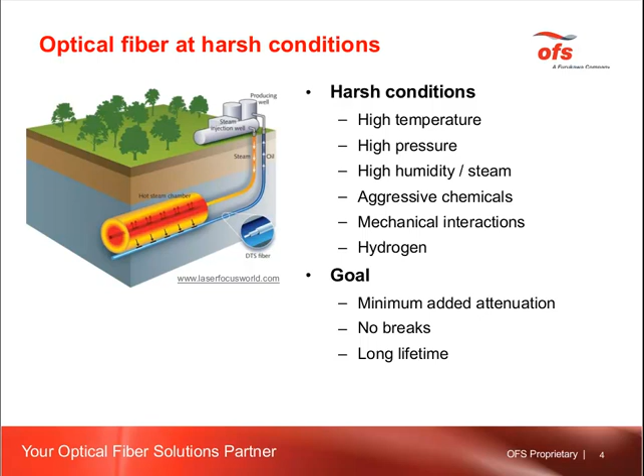And the goal for us as optical fiber manufacturers is to produce such fiber for which we will achieve minimum added optical loss during the usage time, ensure that there are no breaks in the fiber, and extend the lifetime of this fiber as much as we can. Now, what can fail in the fiber and what are the failure criteria? It could be, for instance, the loss of strength by a certain amount of gigapascals. It could be added attenuation by a certain amount of dBs per kilometer. It could be something more simple. For instance, the fiber starts sticking to the hardware, or the coating is outgassing.

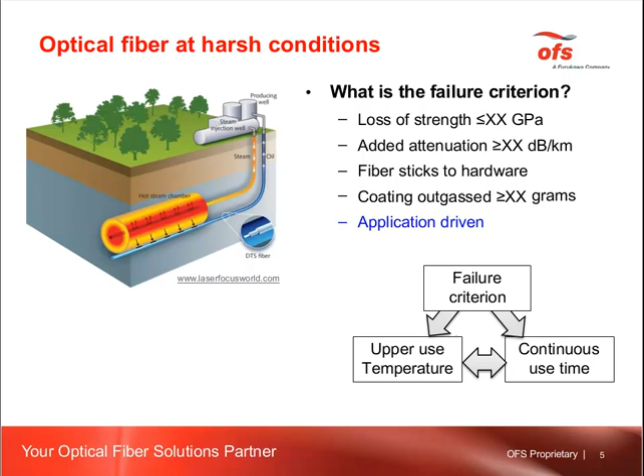And in any case, we should say that always the failure criterion is application driven. It depends on the application. Take the same fiber and use it in two different applications. For instance, one application may be in medical area, the other in geophysical. You will have a different list of the requirements, different list of the failure modes, and therefore a different list of the failure criteria. Now, if the failure criterion is defined and if the fiber is used at elevated temperatures, then we can start speaking about what is the upper use temperature, what is the continuous use time, and both of them depend on the failure criterion, and also they are related to each other. I'm going to explain it in a while.

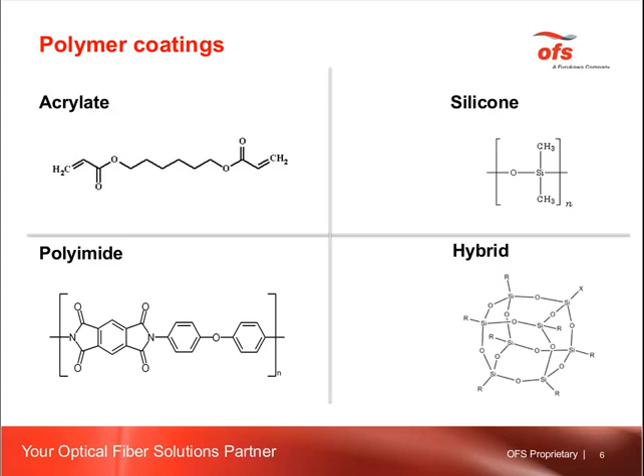Molecular-wise, there are four main chemistries which are successfully used for coating optical fibers. Most common are acrylate coatings. All these formulas, of course, are oversimplified. Less common are silicones and polyimides, and even less common, but more and more popular recently, are so-called hybrid formulations, which are hybrids between organics and inorganics. They have a silica-type backbone, Si-O-Si, from which some organic radicals are evolving. For instance, acrylate groups can be included in these organic radicals.

Most common telecom-grade fibers have dual acrylate coatings with a soft primary with a Young's modulus about 1 megapascal and a hard secondary coating with a Young's modulus about 1 gigapascal. The role of the primary coating is to cushion possible microbends. Such coating typically is rated to temperatures about 85 degrees C, which follows from the data sheets of most producers of optical fibers. On the other end, we have polyimide coatings. Polyimide coatings have very high thermal stability. Such fibers can be continuously used up to 300 degrees C. What is of interest for us in this presentation is some intermediate options.

Can we modify acrylate coating to get something with higher thermal stability? For instance, we can, instead of a dual coating system, use a single coat. We can utilize a silicone as a primary coating. We can try a hybrid organic-inorganic material as a single coat.

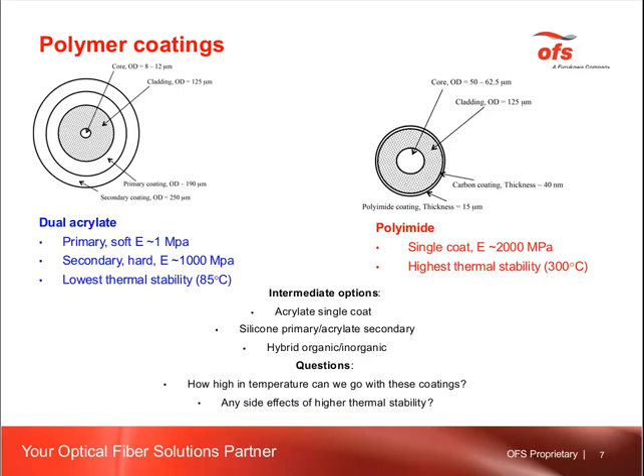So there are different strategies, and for us, the main questions were, how high can we go in temperature if we do such modifications? And the second question, do we sacrifice anything? Are there any side effects if we improve the thermal stability of the coating? Should we sacrifice any important property of an optical fiber?

So for this study, we selected a long list of coatings. Most of them are commercially available, so we got them from different manufacturers. There is a list of primary coatings from P1 to P9. We also used two silicone coatings, Si1 and Si2. These silicone coatings are UV curable. They have acrylate groups in them.

There is a series of secondary coatings from S1 to S5 and a list of monocoats from M1 to M4. Also, a hybrid formulation was utilized once. It was used as a monocoat. All these coating formulations have different chemistry. Some of them contain urethane, which is marked in the second column by U. Some of them do not have urethane, which is marked by N.

In two cases, we added a cross-linker, CR, so primary coatings P6 and P7 were made out of P2 by adding 10 or 20% of a cross-linker. Primary coatings P8 and P9 were formulated ourselves. For this, we used two different polybutadiene-based oligomers, one with urethane and the other without urethane. These are the only coatings that we formulated ourselves.

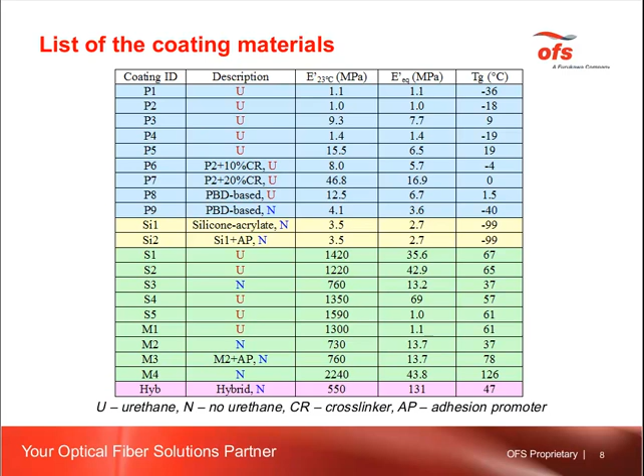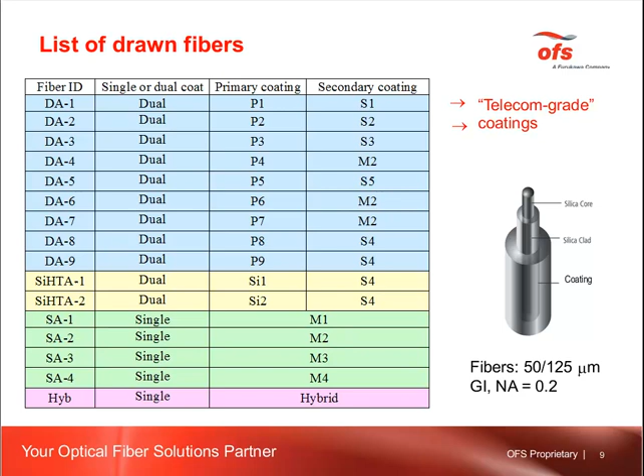So we drew these fibers and we tested them using an extensive test program. The first half of the test was so-called common tests. So they are relevant, for instance, to telecom fibers. And the first test in this series is the coating strip force. If you have a fiber with an acrylate coating, then ideally you should be able to strip this coating mechanically without breaking the rest of the fiber. For telecom-grade fibers, there is a specification. The strip force must be in the range between 1 and 9 newtons.

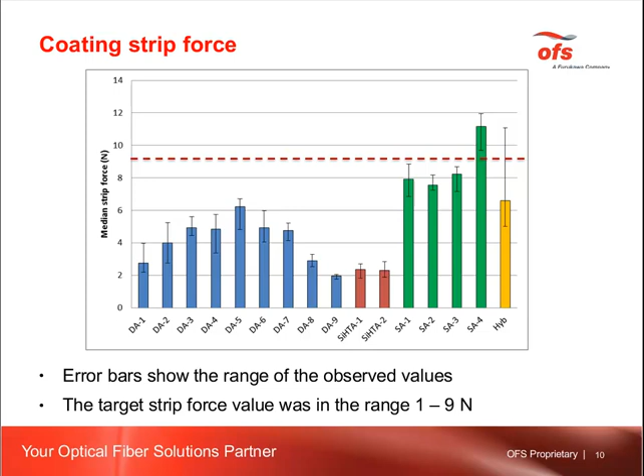So for all the dual coating systems, we see that the strip force falls in this range. For single-coated fibers, there may be some problems. Really, the strip forces are significantly higher. And for two of the coatings, at least some of the data points fall above 9 newtons. And indeed, the coatings SA4 and hybrid coatings are hard to be removed from the rest of the fiber without breaking the glass. So we notice advantages and deficiencies of different properties, and then at the end we will summarize them all together.

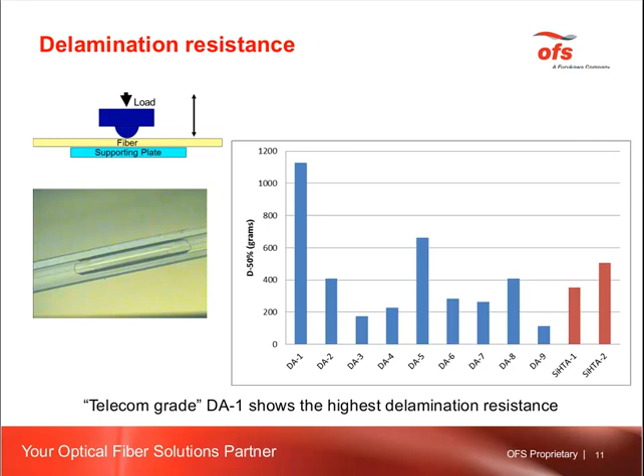Another important property, delamination resistance. This is relevant to dual coatings only. If we indent an optical fiber by applying a force above it, then sometimes we can see that a delamination developed. Delamination between the glass and the primary coating. The higher is the force which is needed to create this delamination, the better for the fiber, the higher is the delamination resistance. So the delamination resistances that are obtained for dual-coated fibers are shown here. The clear winner in this test is a fiber with the telecom-grade coating DA1, and there is a fiber with the coating DA9 with the lowest delamination resistance among this series.

Microbend sensitivity. For this, we used a standard procedure. A fiber was placed on a rubber pad, covered with a mesh and loaded from the top. Simultaneously, we measured the induced optical losses, and the results obtained for 2.5 kilogram load force are shown on the right part of this slide.

So here we have the added optical loss. As expected, dual coatings exhibit smaller added optical losses because they have soft primary coating. It cushions the microbends. Surprisingly for us, we see that fibers with silicone primary coating, although silicone is soft, exhibit somewhat higher added optical loss. And of course, single-coated fibers exhibit on average higher optical losses.

Another surprise for us was a relatively low difference between the dual coatings and single coats. Single coats do not have this cushion layer. However, the differences may be 1.5, 2 times only between dual and monocoats.

We determined the strength of all these fibers using two-point bend test technique. All the fibers are stronger than at least 4 gigapascals. Most of them are stronger than 5 gigapascals. And applying this test at different strain rates, we also determined the stress corrosion parameter, the N values.

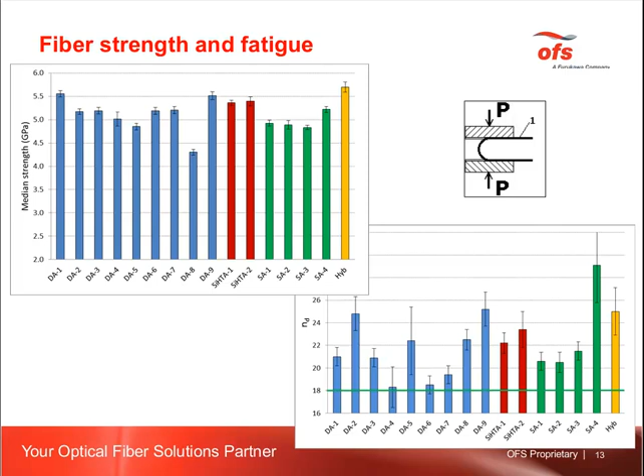There is an industrial standard for the N values. They're supposed to be above 18. And we see that for all the drawn fibers, the N values are indeed above 18. Some of them are very high, but for some of the coatings like DA4, DA6, they are dangerously approaching the number of 18. So that was the end of the standard test program.

Now I'm switching to the high temperature and harsh test program. If we're talking about thermal stability, what is it? It can be defined differently, and as I told in the very beginning, for each application it depends on what this application is. So here we applied an extensive test program. First of all, the fibers were tested using dynamic thermogravimetric analysis in air.

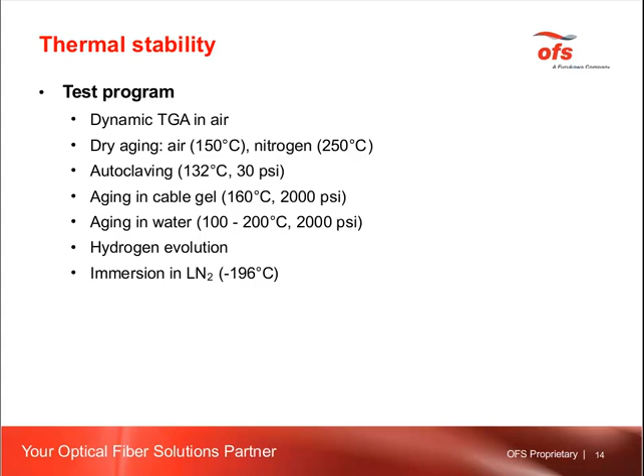Then we applied dry aging in air and in nitrogen. Then the fibers were exposed to autoclaving. Then we used high temperature and high pressure aging of fibers in water and a cable gel. We also tested fibers for their hydrogen evolution. And we also tested another extreme, the low temperature region. We immersed fibers in liquid nitrogen. I'm going to describe these results one by one. First of all,

an important failure mode at elevated temperatures is thermal decomposition of the coating. And this can be followed using thermogravimetric analysis. In this method, a sample is heated from room temperature to some high temperature, and at a certain point we can see that the weight of this sample is getting lower due to thermal decomposition. So we can follow thermal decomposition using thermogravimetry, and the question is, what should we take as a failure criterion?

Since the actual failure of the optical fiber depends on the application, and since we do not know in the beginning what the application of this fiber will be, we are free to select an arbitrary number. So we decided, let's take 25% weight loss as the failure criterion. So we assume if at an elevated temperature the coating loses 25% of its initial weight, that is the end of the lifetime for this coating and for this fiber.

The TGA experiments can be performed at different heating rates, and using some equations we can determine the times and the temperatures that correspond to this 25% weight loss achieved by the coating. This data then can be plotted in Arrhenius coordinates and extrapolated to other time and temperature conditions.

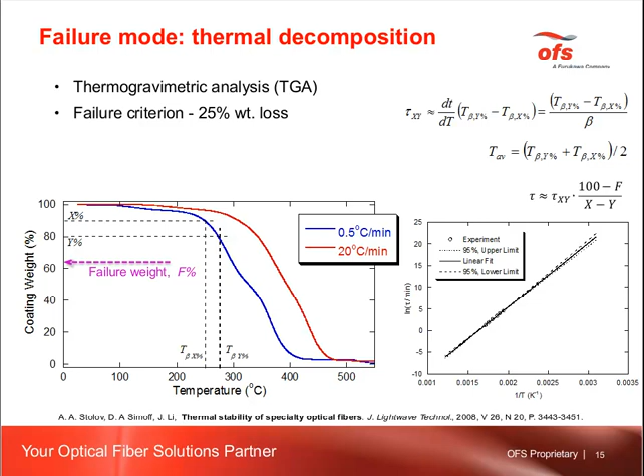On this slide, on the left-hand part, you can see examples of the TGA curves obtained for different coatings, and you can see that these curves are different. They can be used as a fingerprint for different coatings. And on the right-hand side, there are examples of the data that we obtained using the TGA method.

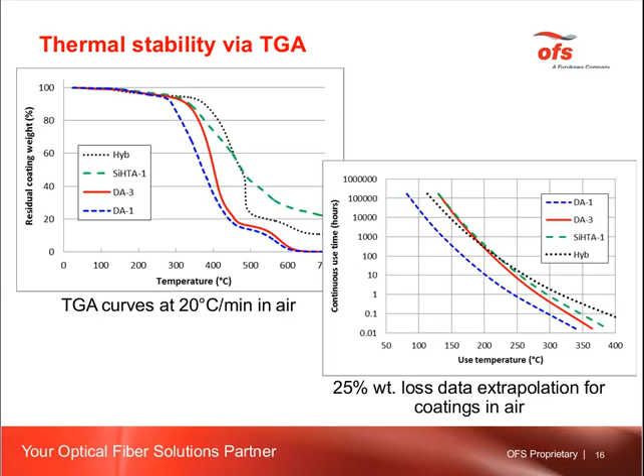So they correspond to the 25% weight loss criterion, and the x-axis is the use temperature, and the y-axis is the continuous use time. These two parameters are correlated to each other. I'm going to explain it in a little more detail in a couple of slides.

The important thing is that from these dependencies, we can determine the upper use temperature for individual coatings that corresponds to the 20-year lifetime. And these data are shown on this slide. So for all 16 fibers, we have the upper use temperatures that are obtained by extrapolating our TGA data.

The first two columns correspond to the telecom-grade coatings, DA1 and DA2. And you can see that these numbers are grouped around 85 degrees C. That agrees well with an official rating for telecom-grade coatings. Indeed, telecom-grade coatings are typically rated to be good up to 85 degrees C. And that justifies well our failure criterion selected for the TGA, 25% weight loss.

Now, if we look at the highest numbers here, the highest numbers are around 130 degrees C. The absolute winner in this test is a fiber that has a silicone primary coating, but there are also other fibers, SA2 and 3, for instance, or even DA3 fiber with a dual coating, which have pretty high upper use temperature. What is important for us is that we are not getting very high numbers. The highest numbers we can get is about 130 degrees C.

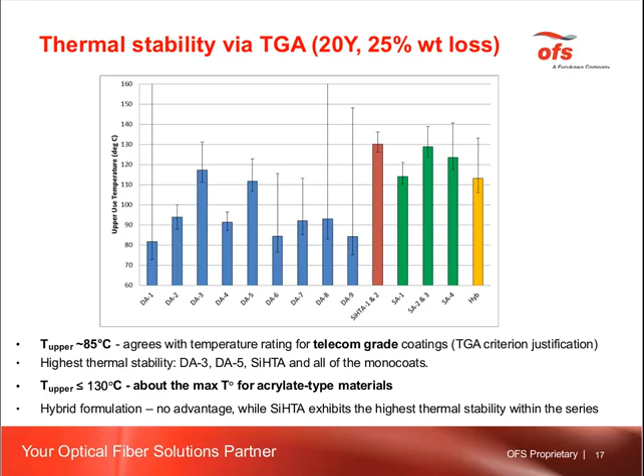One of the examples of the correlation obtained from the TGA data is shown here. So that is the curve for one of the coatings with the x-axis equal to use temperature, and the y-axis is the continuous use time. So for this coating, the 20-year lifetime, according to our TGA criterion, corresponds to 130 degrees C.

Now, can this fiber be used at higher temperatures than 130? Yes, it can be used, for instance, at 300 degrees C, but for a shorter time, about 1 hour. Unfortunately, this comparison shows that there is a big room for speculations. Depending on the failure criterion and depending on the usage time, we can say for the same coating that it is good up to 130 degrees C, or it is good up to 300 degrees C, or to any other temperature.

And unfortunately, some manufacturers of optical fibers can say that this coating is good up to 130 degrees C, and the other manufacturer will give a different number. Once again, it is a room for speculations. Ideally, we should provide here what was the criteria and what was the continuous use time that is in mind.

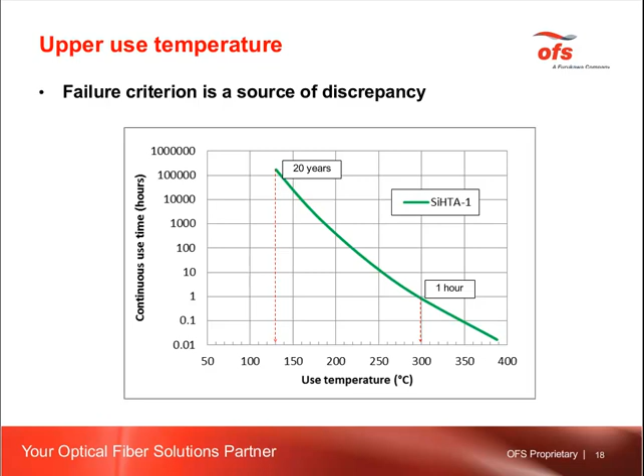So these fibers were then aged at different conditions. This slide shows one of the examples. Dry aging at 150 degrees C for 28 days. What we observe, we see some discoloration, stronger for standard telecom fiber DA2, less for fiber with silicone primary coating, and in one case we observed cracking. This case corresponds to the hybrid formulation.

We measured the strength of the fibers before and after the aging using two-point bend test technique, and we see that all the fibers are pretty strong after this aging. So this discoloration and possible shrinkage didn't cause any adverse effect, including the fiber with the hybrid coating.

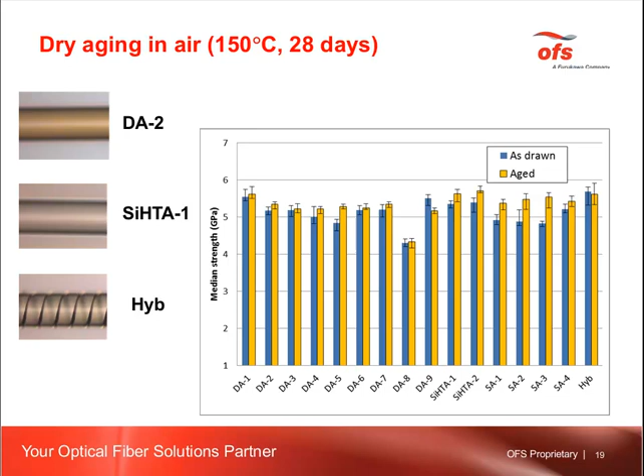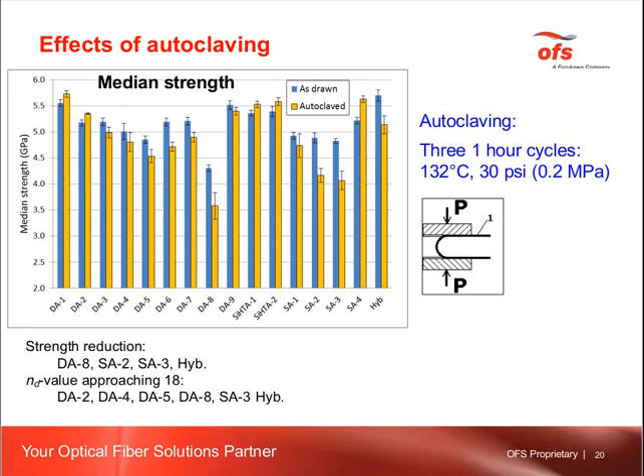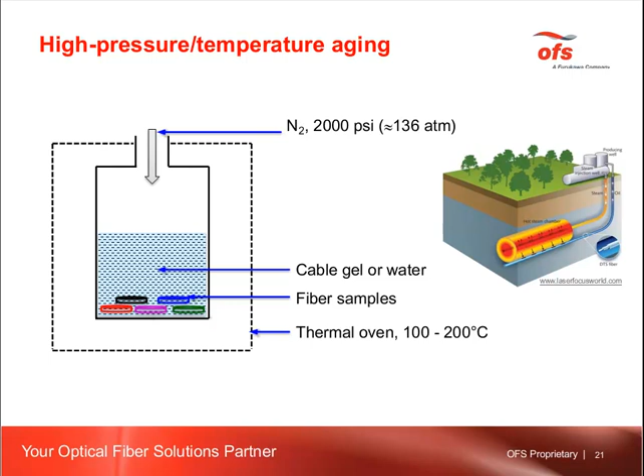Really harsh testing. Short pieces of fiber can be immersed in a fluid like a cable gel or water. Then we can apply a high pressure up to 2000 psi, and we also can place this in a high temperature oven, so we can increase the temperature to values of 200 degrees C or even higher, and that would mimic a real downhole application of an optical fiber. I'm going to show you some of the examples.

The fibers were aged at 2000 psi in water, and the temperature of water was 100 degrees C. What happens after that? We do not see significant discoloration, and two fibers with coatings DA2 and silicone HTA look the same as they looked before the aging. One fiber with a hybrid coating cracked.

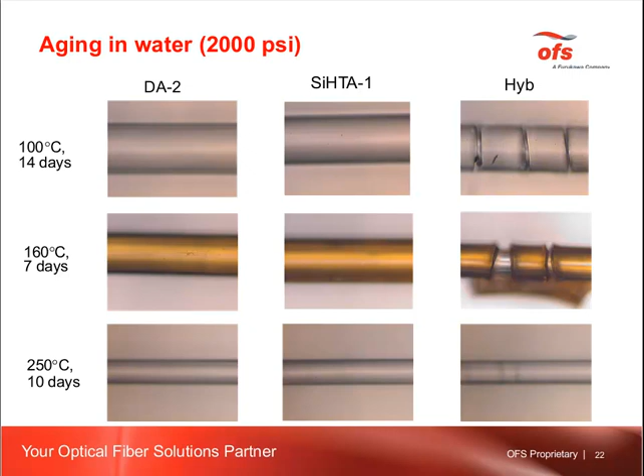If we use high temperature water, 160 degrees C, then we find some discoloration, more cracking for the hybrid coating. In addition to discoloration, we can notice shrinkage of the coating. It means that the coating material starts moving, diffusing into surrounding water. If we further increase the water temperature, what will we see? We see that all the coatings 100% dissolved in water, and the leftover is just bare silica glass.

We measured the strength of these fibers before and after aging at different conditions in water, and these are a few examples. After exposure to 100 C water, we see that some of the fibers are getting weaker, and these results match well with what we get with the autoclave experiment. When water temperature goes to 160 degrees C, then all the fibers drop in strength. But there are still a few fibers which remain pretty strong, higher than 3 gigapascals, and among them there are fibers with silicone high temperature acrylate coatings and some other fibers.

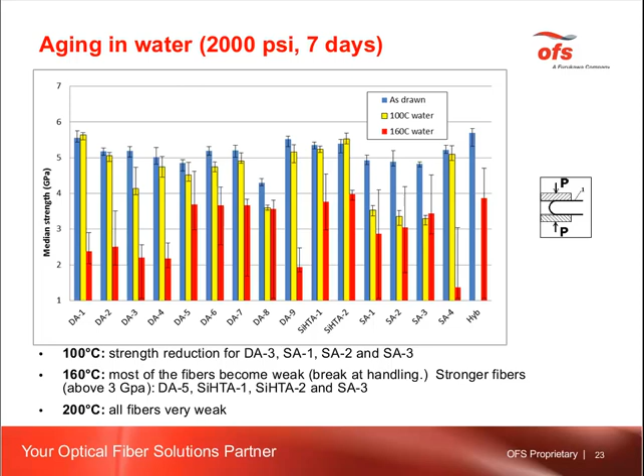If instead of water we use a cable gel, what's happening? We used the cable gel, immersed fibers in it, applied high pressure, and the cable gel temperature was 160 degrees C. Then most of the fibers we observe do not lose their strength, but there are two exceptions. There are two fibers where the primary coating was based on polybutadiene oligomers. These oligomers swell very strongly in the cable gel, and the coatings became loose tubes, easily removable from the fibers. So definitely such type of primary coatings are incompatible with usage in a cable gel.

Hydrogen evolution was tested for some of the coatings, and the results are shown here. The highest number we see is 0.7 microliters per gram. Is it a high number or a low number? Notice that this number corresponds to a fiber with a silicone primary coating. There is a rumor that silicone coatings generate lots of hydrogen, and this is really true for thermally curable RTV type silicones. At the bottom of this slide, you can see the number: 100 microliters per gram, milliliters per gram, is typically evolved from RTV type coating. So all these fibers can be considered as evolving just a little hydrogen, and this shouldn't be a problem. And for two of the coatings, we see that no hydrogen was generated during the testing.

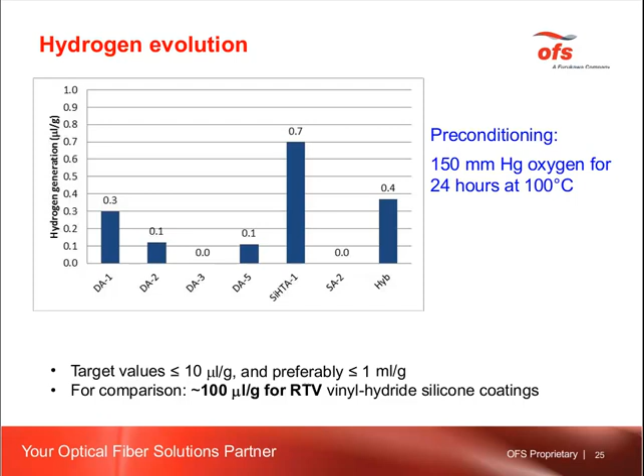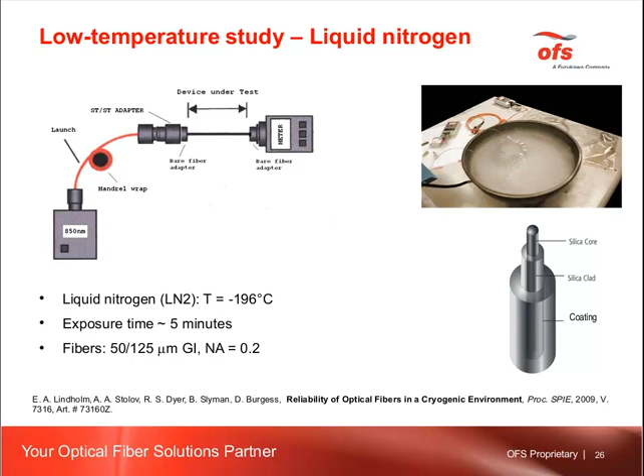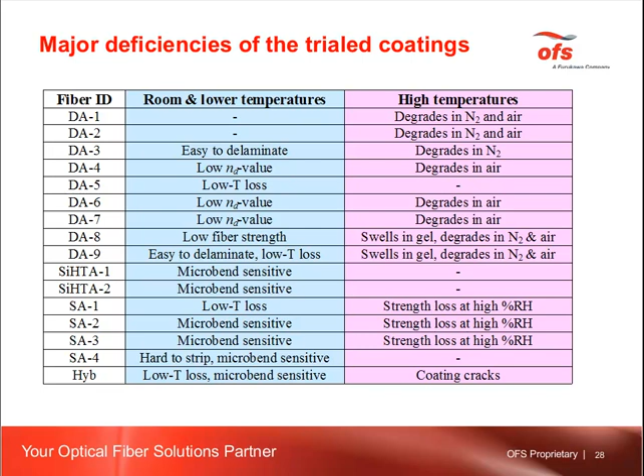For us, this comparison is very important because we make optical fibers, and knowing the performance of the coatings, we can have this in mind if a customer is approaching us and explaining a specific application of the optical fiber. Then we can select the best coating for this particular application from this list. And this brings me to the conclusions. First of all, telecom grade coatings are optimized for use at temperatures around 23 to 85 degrees C or lower, but tend to fail at elevated temperatures and other harsh conditions.

Silicone acrylate dual coatings display the best performance overall at elevated temperatures and exhibit high resistance to water. They are the best coatings, at least within this series of testing, for some mid-temperature applications, for instance. If we take overall the ambient temperature and harsh performance of the fibers, then there are single-coat SA2 and SA3, which we consider to be the second in performance. They sustain high temperatures well, but they are sensitive to moisture. That is their deficiency.

And once again, per our TGA lifetime criterion, there is a limitation for the upper use temperatures of acrylate-based coatings. Even the best coatings cannot be continuously used above 130 degrees C. At shorter use times, however, the coated fibers can survive much higher temperatures. So once again, there is big room for speculation, depending on the failure criterion, depending on the usage time. We can say that the same coating is good up to 130 degrees C or 300 degrees C. And here we should put in the data sheet what test was used for getting this particular number.